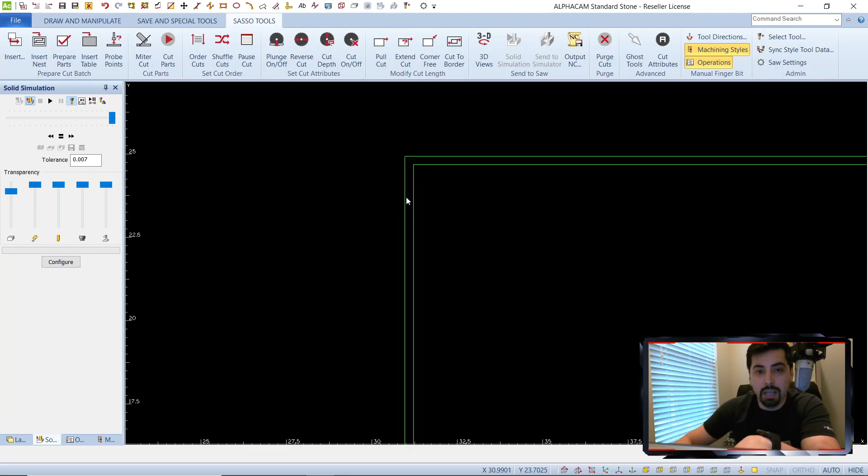So in here I've got my flush mount cooktop. This is actually from a customer I was trying to help. What we've got here is the inner line is the actual cutout. This outer line is where we need to cut to a certain depth with the finger bit.

So what we're going to do here is go to change, go from geometry to construction, click OK, and change the outer line - no, not the inner line. There we go. Now I'm going to cut this like normal.

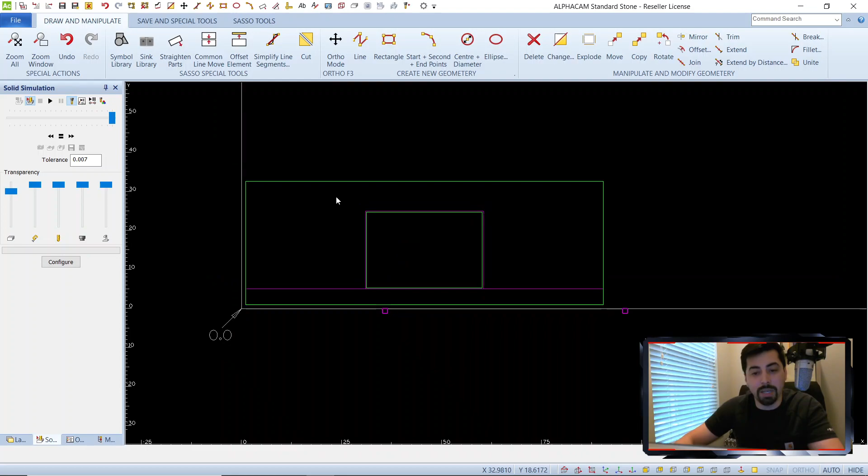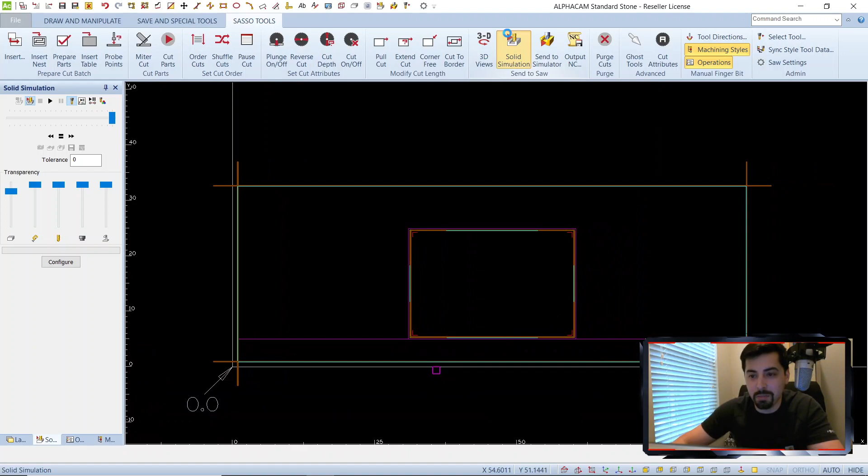I'm going to cut parts, and cut parts again. Okay, it's pretty much done here. There we go. Great. So this is going to cut all the way through - it's going to do the actual cutout for us.

So now we've got to do the flush mount part. For this, we can change this back - go from construction to geometry. Go ahead and change your outer one to geometry.

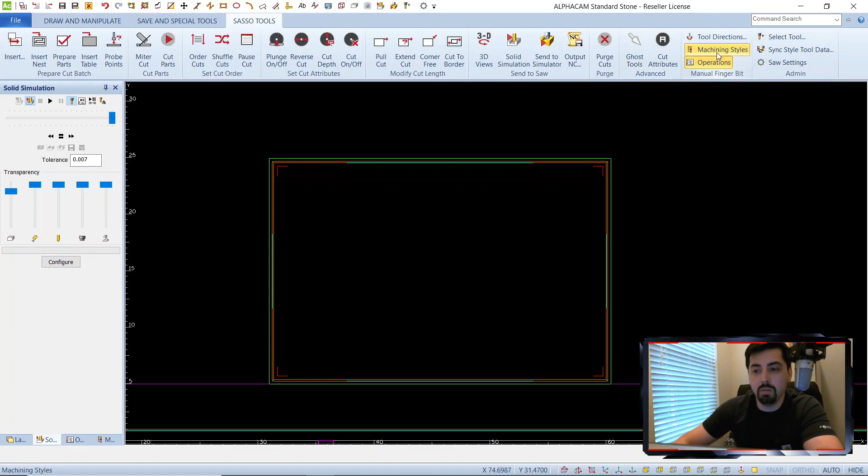Okay, great. Now let's go to Ghost Tools. You want to make sure the arrow - that's the direction or side of line - is set on the side you want it to be. This one's internal, that's great. If it was on the other side, we could use tool directions and flip it one way or the other. But this one's good, so we'll leave it as is.

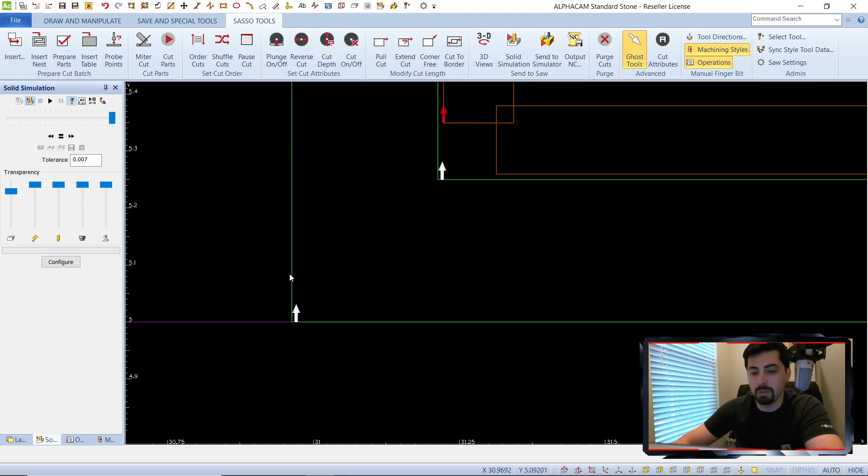So we can turn Ghost Tools off. What we're going to do is go into our machining styles. I'm going to pretend I don't have one of these here - let me just delete that one, and we'll make one real quick.

So you should have some folders in here. Let's open one of these up, and we're just going to create a copy. We could use any of these - let's use 3cm partial no lead, that's fine. Just right click on it and then click copy. Now it says copy of 3cm partial no lead.

Go ahead and right click, rename. We'll just do 0.5 deep. There we go - we only want to cut 1/2 inch deep for this project.

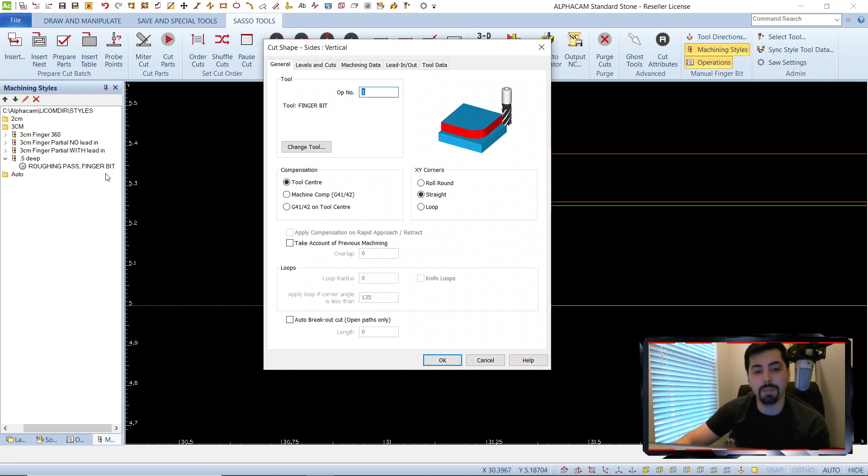If you click the little arrow on the left of that, it'll open it up and go to roughing pass. Now we're going to right click on roughing pass and go to edit operation. Make sure you have the correct tool selected, then go to levels and cuts. This is where we're going to set our final depth.

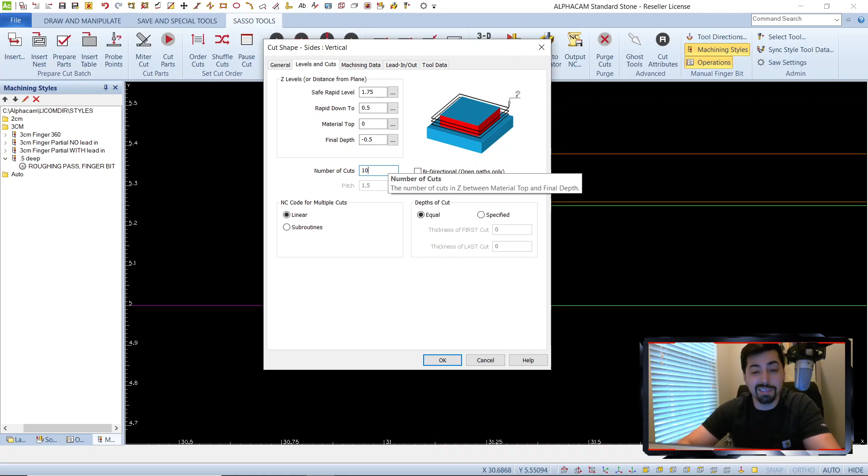So let's go -0.5. On a Sasso, you're starting from 0 being the top of the stone, going negative down into it. So -0.5, set your number of cuts - we'll just do 10 cuts, that's fine. Bidirectional, we want that checked on, so it goes back and forth instead of making one cut and raising up.

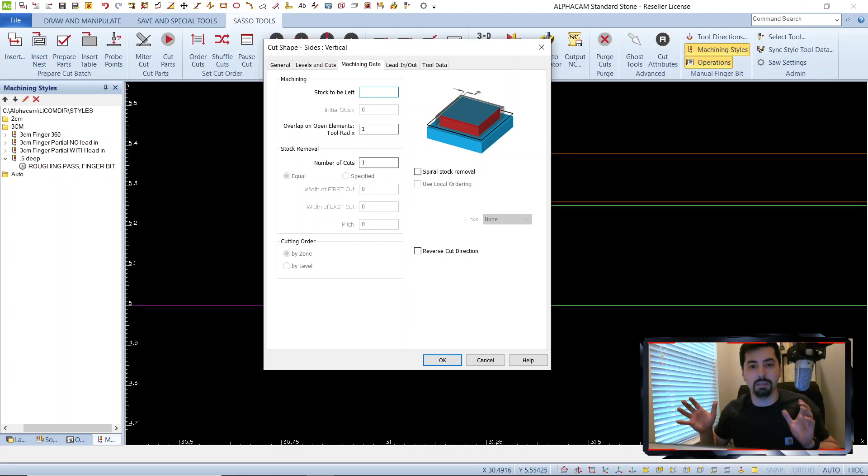Beyond that, we're going to set our stock to be left, under machining data, at 0. We don't want to leave any material because this is a flush mount - we probably don't have a lot of leeway, maybe a little bit, but we want it tight. So stock to be left at 0. If you wanted to leave some material, you could leave it at a 32nd or whatever. That's just material it's not going to cut out - 0 means it's going to cut wherever we have the line applied. Let's go ahead and click OK.

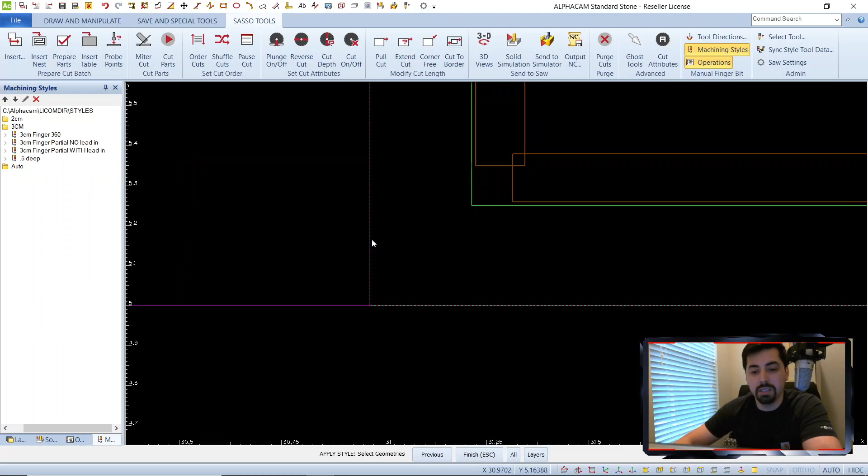Now we can right click on our new 1/2 inch deep style and go apply to selected geometries. We've got the entire thing we're going to apply it to - just left click on the green line and then right click. Now we've got a new red line, that's our finger bit. Yours might not be red - might be orange or something, I don't know. But there we go.

Let's see how this looks. Go to our solid simulation and blast through this. Sweet, there she is. Let's go to a 3D view - that'll give you a better idea of what's going on here. So we've got our 1/2 inch step down. This is a 1/4 inch gap, that's what the program called for.

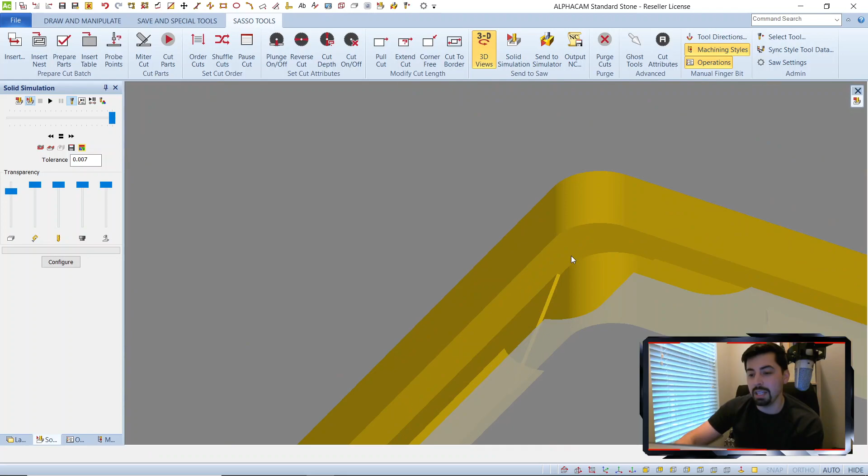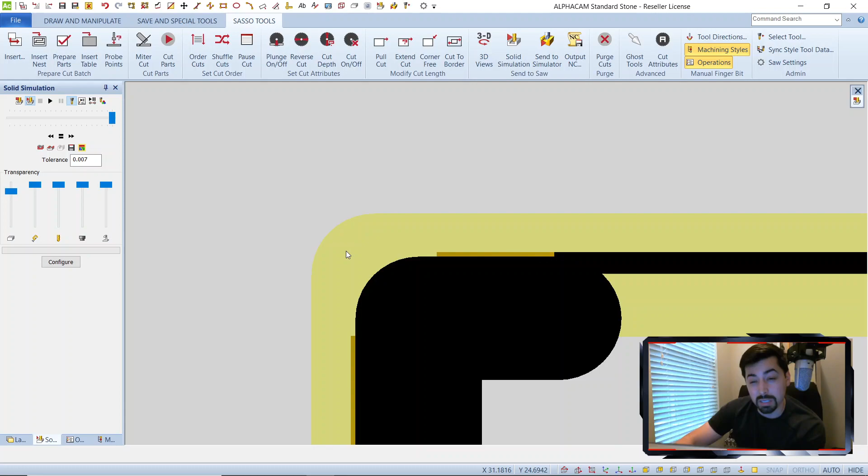So one thing you really want to think about is the radius in the corner. You can only do a radius as small as that finger bit - this is like a 3/4 inch finger bit, so the radius is pretty big, to be honest. You can get smaller finger bits, like a 1/4 inch one - that might be better suited for something like this.

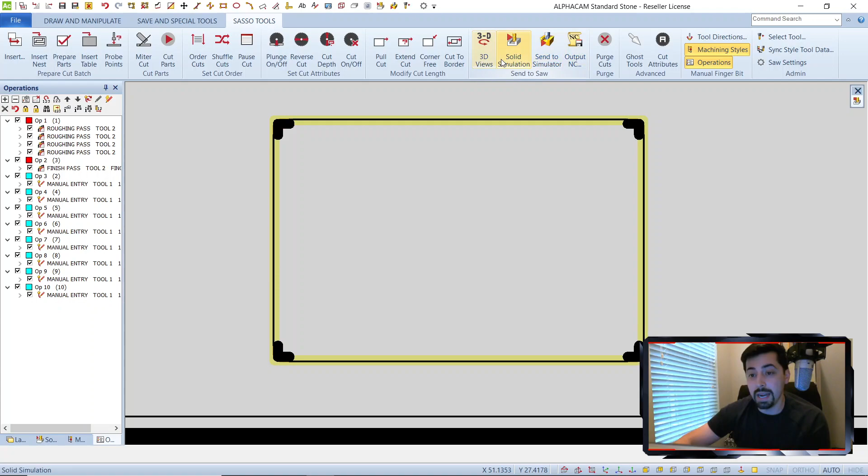Other than that, before we actually send this out, remember go to operations. Anytime you do any manual machining style stuff, you've got to bring that finger bit to the top of your operations. The easy way to do it: just click on order cuts and right click in the black area, and it'll shuffle it to the top. So there we go - now this one is ready to go. You can send it out, cut it, do the whole thing, and that's that.

So that is a Flush Mount Cooktop.